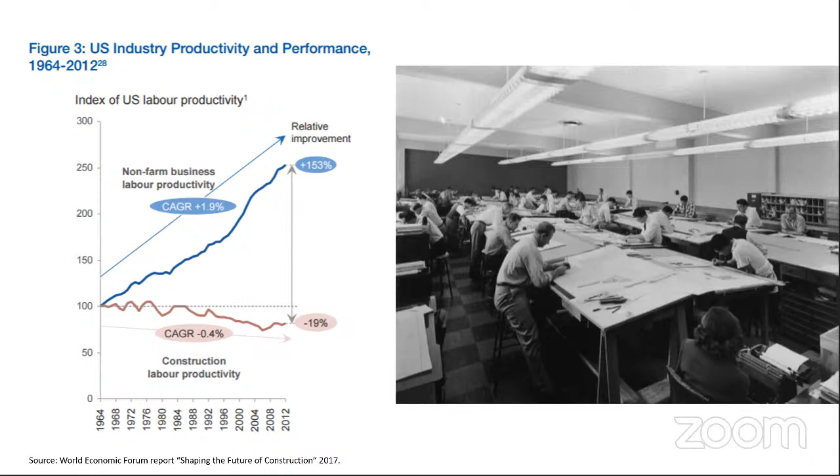A little about the industry itself: according to a survey, it is noted that compared to non-farm business labor productivity industries, construction labor productivity has dropped about 19% over 50 years. That means construction productivity has remained neutral, or in fact is reducing, owing to various reasons. This is because the civil infrastructure industry is investing a lot less on technology than other industries. For example, manufacturing industry is investing about 3.3%, whereas we are only at about 1.2%.

Given the 5-year construction output forecast, it is noted that rail, roads, and airports will take the main stage, and 50% out of that, the lion's share, will belong to roads and highways, which is about $5.2 trillion worth of projects coming our way. This creates an excessive demand in the way a project needs to be conceived and constructed. So we need to step it up. Relying on or moving to digital construction methodologies, or entirely digitizing your work process for design and construction, is estimated to save about $1.2 trillion worth of money for contractors, designers, and owners alike.

So what is the buzzword here? I'm sure most of the participants on this call have used BIM in one way or another. I don't want to re-emphasize that, but what is BIM for us from an infrastructure standpoint? It is a 3D model-based design which provides better design efficiency. 3D forms the crux of BIM.

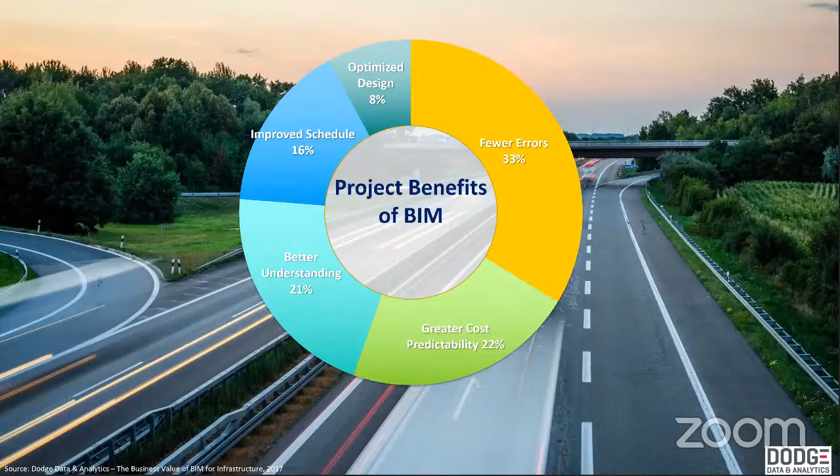So what were the business challenges when it comes to the design and engineering or consulting space, and the contractor space? What were the business challenges?

So project complexity is increasing, thereby increasing design time and reliance on various design software. And of course, hiring and retention of talent. If you ask new talent coming into your firms, whether owner operator, design consultancies, or contractors, they would want to work on state-of-the-art technology. So this is one of the challenges.

So in relation to that, let's see what benefits BIM could offer. You always have a competitive advantage over your competitors if you use a multitude of products and also rely on a BIM-based workflow, so that definitely is a plus.

And increased profitability. As you saw in the earlier slide, cost predictability was good, timelines and schedules could be met, thereby increasing profitability for an organization. And a lot less business risk, for example at your office, when it comes to change management and so on. And of course hiring and retention, as you look at the latest and greatest technologies for roads and highways design, your staff will be content with the usage of technology.

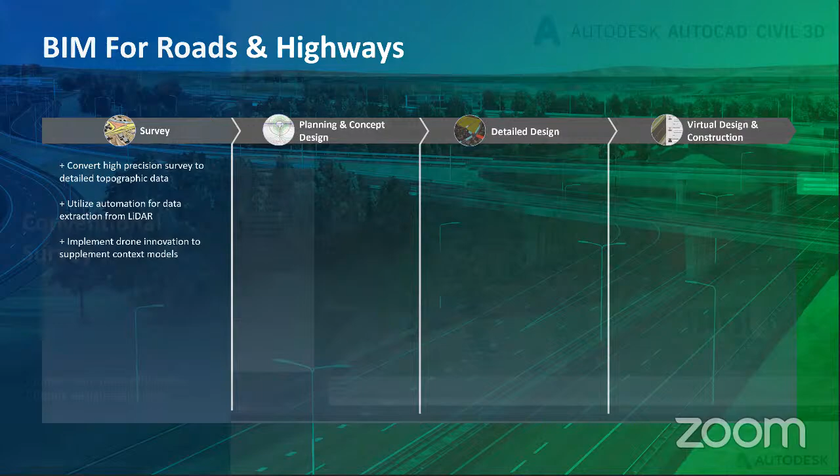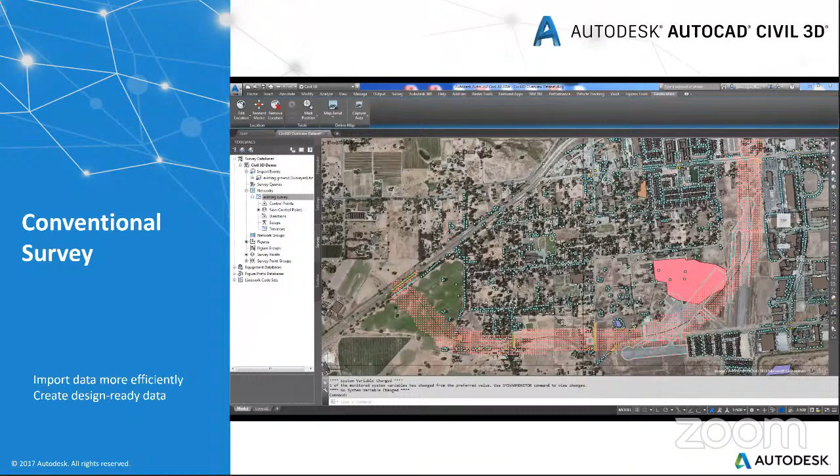This was the typical way in which people used to bring in survey data. So for those of you who are still on AutoCAD and rely on it to bring in survey data from total stations, Civil 3D will definitely be a blessing because it accelerates several steps in your survey data import.

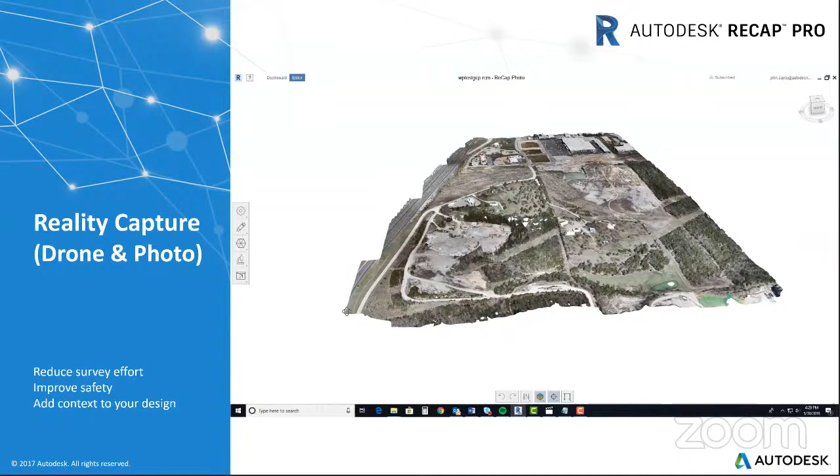While this was a conventional survey, there are other means by which you can import survey data. Say you're doing a preliminary engineering survey and you just have a drone with you, rather than relying on surveyors entirely for several days to capture information on site, you can fly a drone over it, take high definition photographs, stitch it like a 3D panoramic image, and bring it into interfaces such as InfraWorks. This gives a great deal of accuracy.

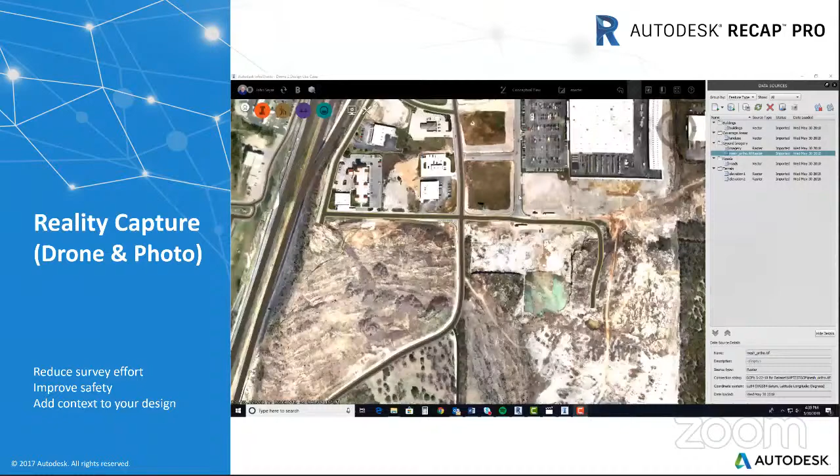This gives a great deal of flexibility to designers, engineers, and surveyors alike. If you're doing preliminary level studies, definitely this is the way to go. Rely on photogrammetry, convert that into mesh models, and use it in your design. This will give you greater cost predictability while bidding for projects.

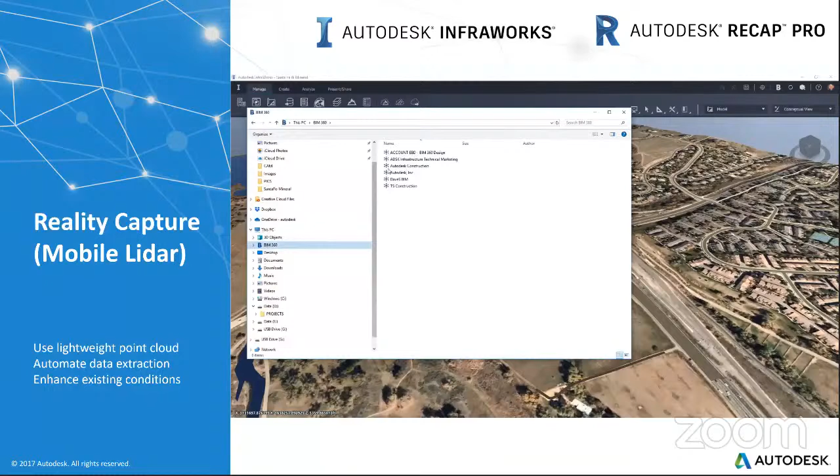While we talk about photogrammetry, what is more accurate, I believe, is mobile LiDAR capture. How are we capturing it? Again, using fly drones or mobile aerial devices to capture LiDAR information, and you have interfaces such as InfraWorks which can bring in LiDAR information, and there's a whole lot you can do.

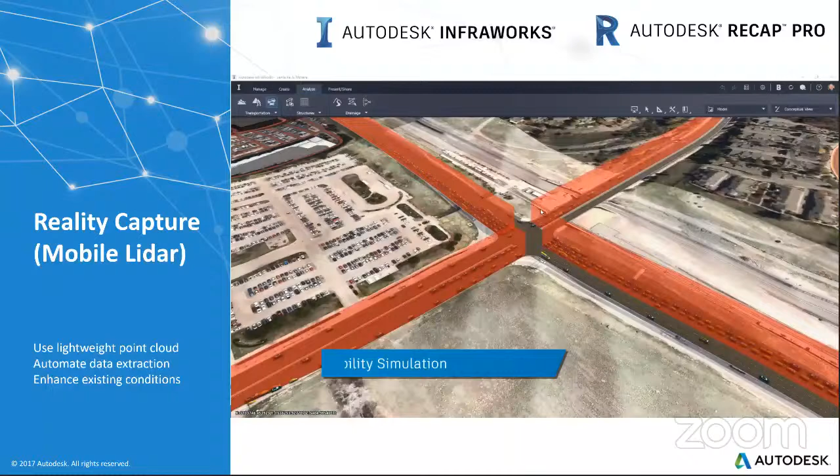Khandelwal sir talked about predicting traffic for a particular city model - you can do that with the kind of surface or models you're generating. What's more important is from an existing condition standpoint, you can capture a lot of features such as feature lines and break lines from the model, right from the mobile LiDAR data capture as well. This gives more accuracy to designers who take this data into their detailed design process.

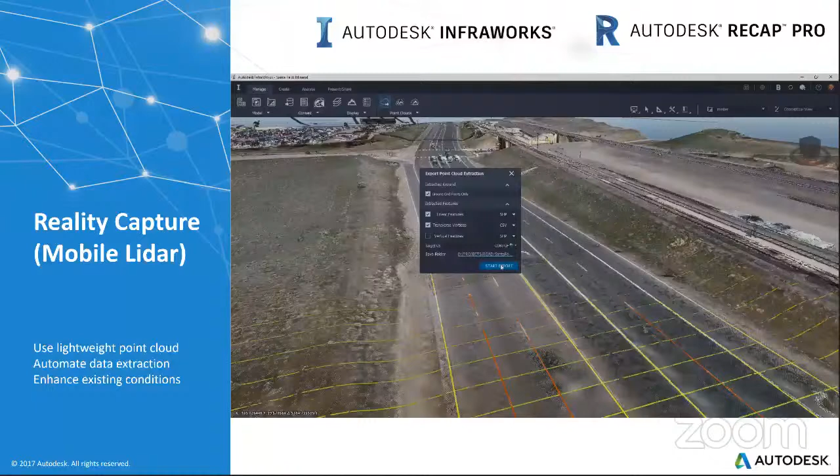So this is one other aspect. Coming to the next step, which is conceptual design - we talked about survey in terms of typical DGPS or total station surveys, photogrammetry, and LiDAR data, and how it can be utilized. Now let us come into the next phase, which is the conceptual design stage.

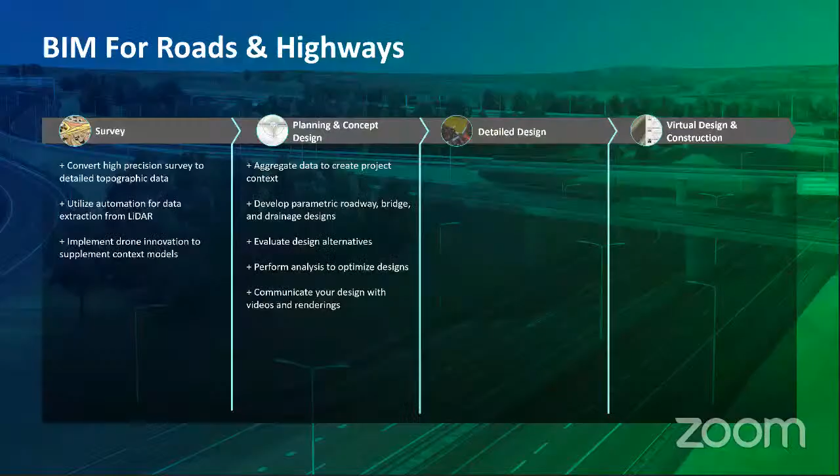What do you do in the conceptual stage? While I was working for a design firm before Autodesk, we used to crave for a concept modeling tool such as InfraWorks to be able to generate options, design alternatives, engineering options. Also, we were not able to connect various pieces like bridges and roads - are we looking at traffic capacity building for that particular road? All of this couldn't have happened on a single model.

Also, clients always believe in conceptualizing the project rather than looking at just 2D depictions of your design idea. So to this process, of course, we welcome it. InfraWorks has been a really popular tool over the last few years, and probably this is the easiest and most intuitive of tools when it comes to roads and highways design.

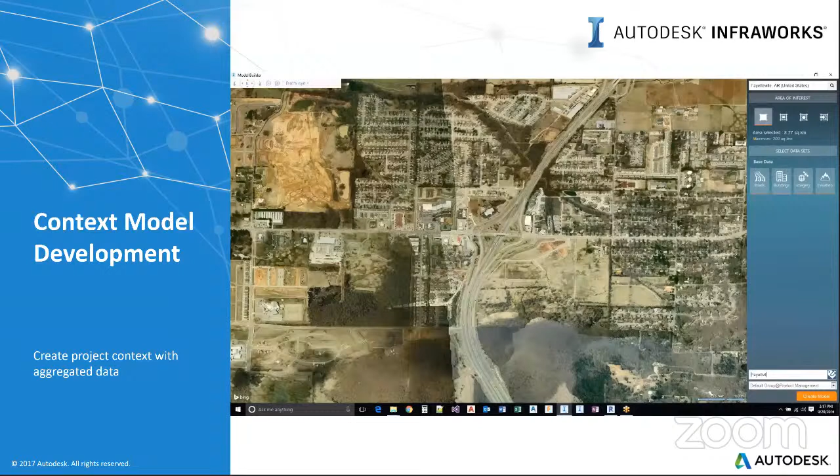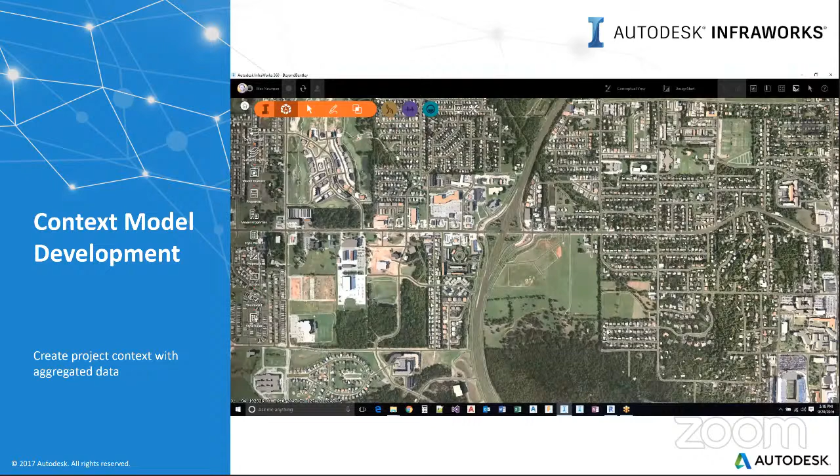It considers a lot of objects. First and foremost, you can bring in your study area onto your desktop and start churning out or sketching your design literally. If you're a project manager heading an infrastructure consultancy, sketch out the design ideas and give it to designers who can translate your design ideas into actual detailed design. This can happen using InfraWorks.

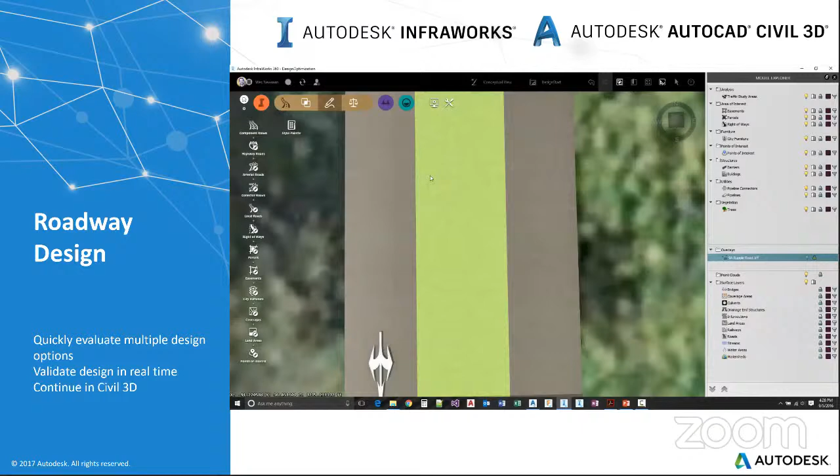Coming to roadway design alone, as I told you, I always crave for a conceptual design model which was constructible, which was practical. Taking into consideration the existing conditions, whether it's terrain, aerial imagery, or GIS data that underlies the particular project area, it is very important to see how your design ideas fit into the existing environment. That is more key, and just by looking at this, clients can assess whether a project is viable or not.

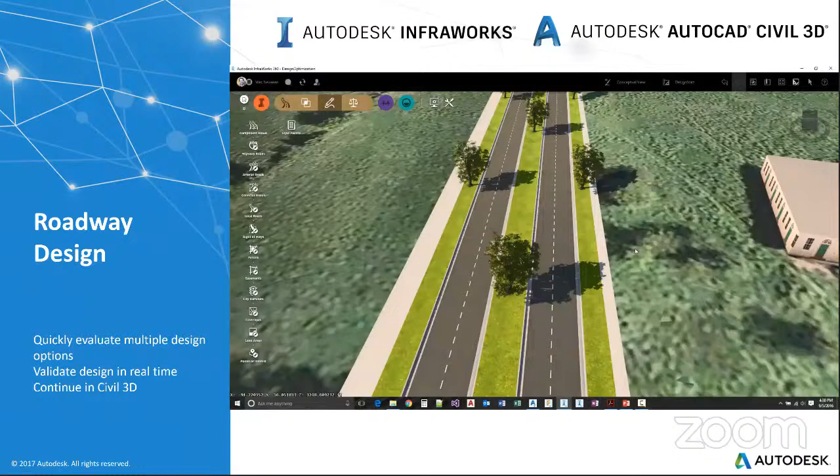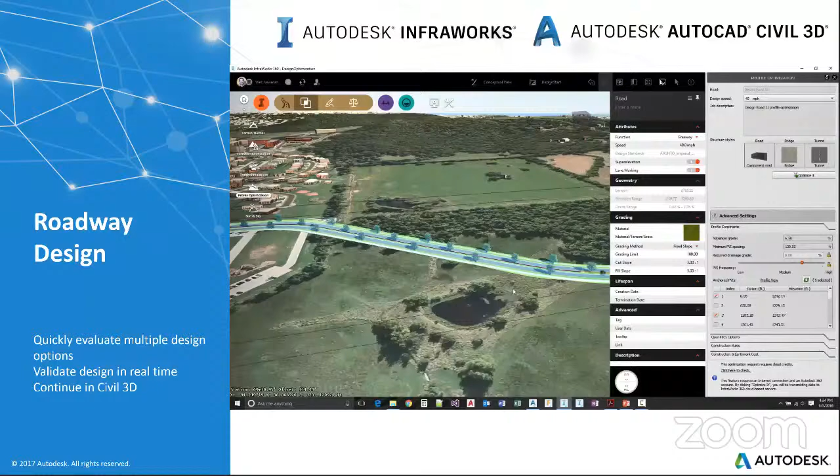You don't even need to rely on any 2D models. Also, the best part about having design tools like InfraWorks is it is an intelligent model - it gives you volumes, whether for roads, utilities, or structures, so you can know the kind of cost that will be incurred for that particular option. And what's more, everybody today wants to see the animation or actual 3D model of the project even before it is built, because a lot is at stake for them.

You can rely on InfraWorks for optimizing your design at the initial stages, and then pushing into detailed design and just tweaking the designs a little bit here and there. That itself saves a lot of time.

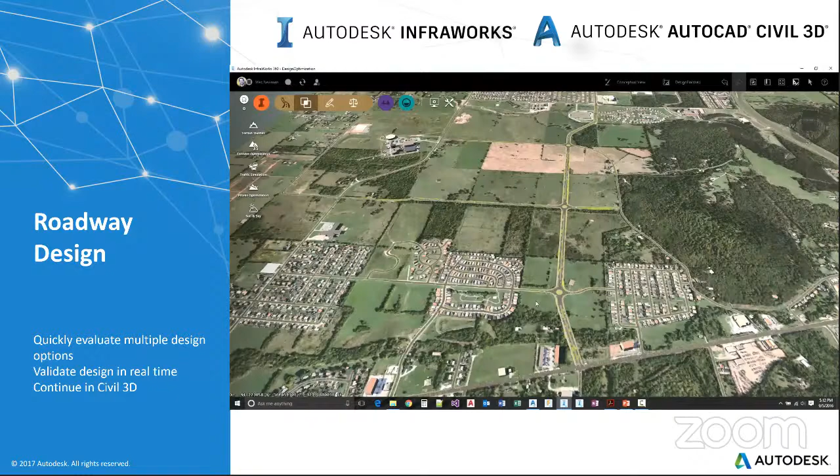Most people believe that convincing a customer on design alternatives is the toughest part, and design changes going to and fro with clients takes away a lot of time. I've heard people saying they've lost about 15 to 20% of their project time only to design revisions, which is not paid for in the India scenario.

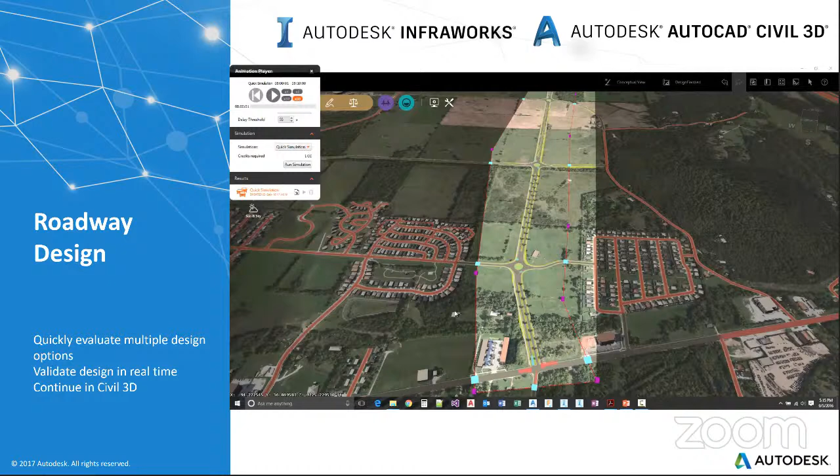So InfraWorks lets you lock on to the design alternatives suggested by the client and then go ahead with the design. This will in turn increase your profitability in the way you work on projects. So that is one aspect of it.

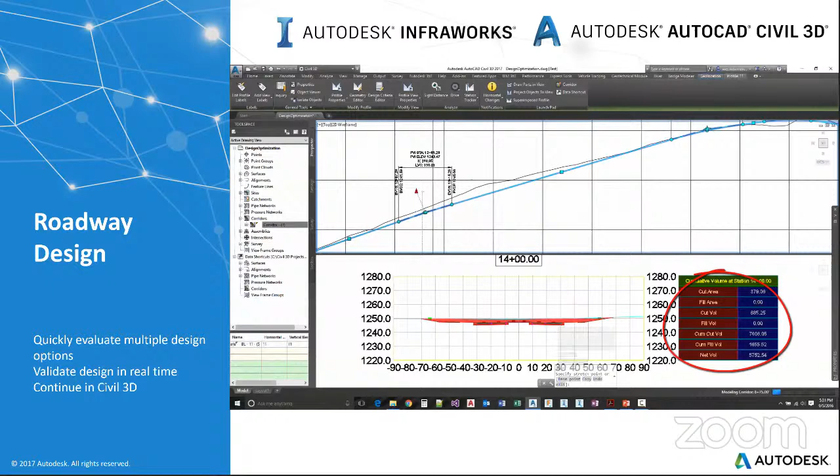And there's another thing - on the model, you can develop a lot of analysis, whether it's hydraulic, traffic, or multimodal simulations. All of this can be done to assess the viability of your road project, and the ease with which you can develop preliminary design and outputs can be really quick - almost instantaneous.

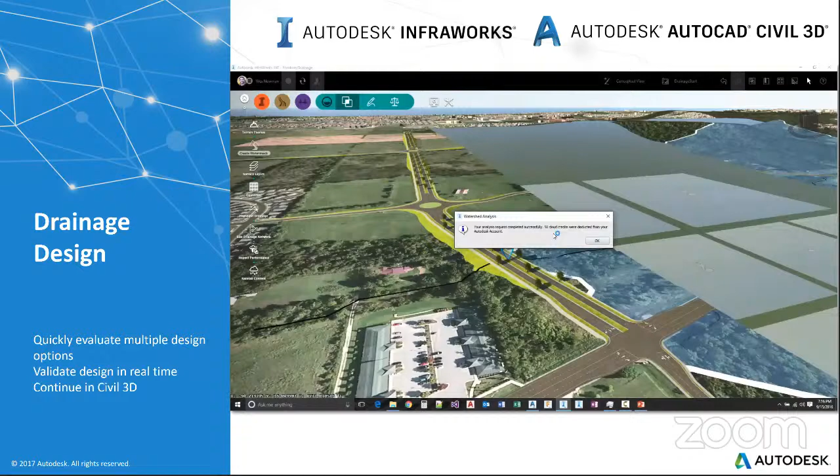Coming to the next aspect, that is drainage design. I'm sure all of you on this call have faced the issue of having the least number of structures along a particular highway, because structures increase the cost. So if you want to see a design alternative, it's also key to note how many CD structures you will require along the project.

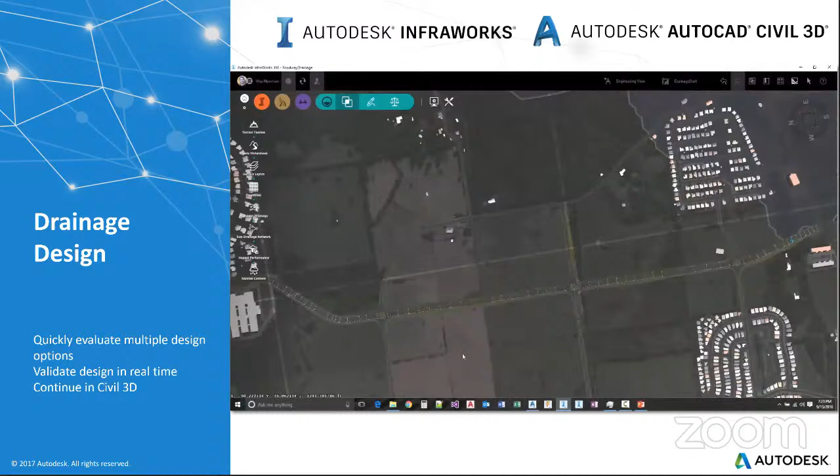How many culverts do you need? How many bridges do you need? How many tunnels do you need? All of this needs to be assessed, and the software will give you the locations everywhere you need a CD structure. InfraWorks will identify the outfall areas across your corridors.

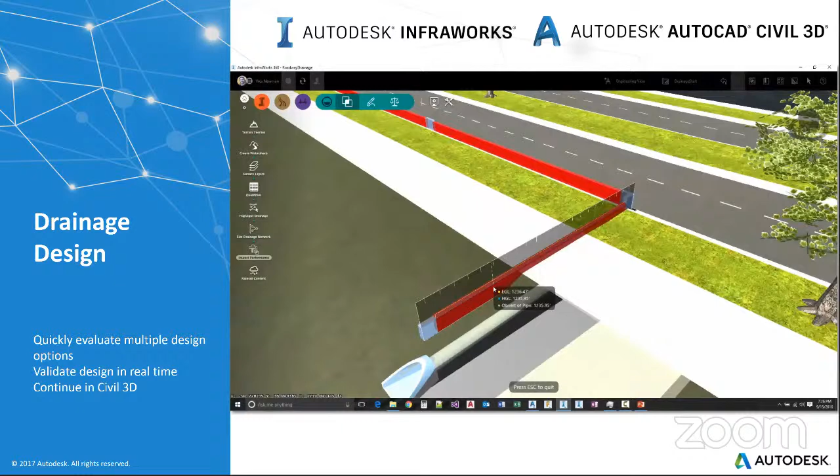It will allow you to develop surface drainage designs on the go as well, whether it's box culverts, pipe culverts, or bridges - it will allow you to assess the viability of that particular CD structure.

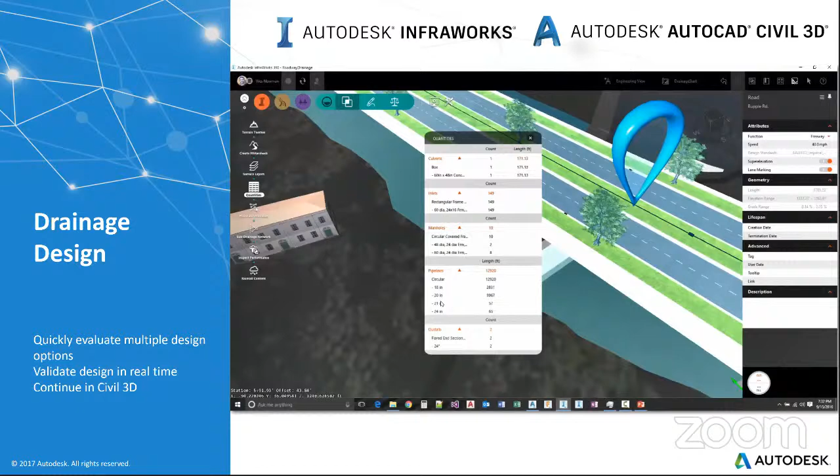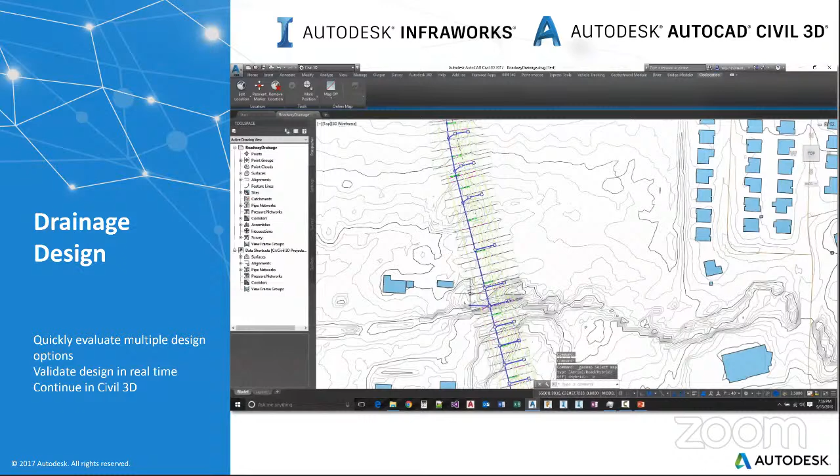And one other thing for bridges is something called flood simulation. You can see the proliferation of water along the linear waterway, and see whether your bridge design is sufficient or not - whether the length or height of the bridge is sufficient in terms of the water flowing through the channel. So that is one good thing.

The next thing is bridge design. As I told you earlier, we always struggled - when I was working with a design consultant, as Khandelwal sir said, we were working in silos. I completely accept that. Bridge engineers and highway engineers never used to interact on a regular basis, and our designs would never reach them in time.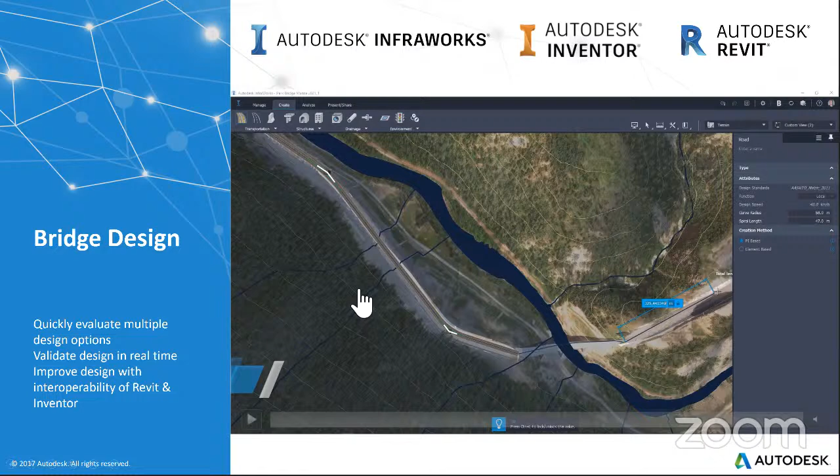We never had a common platform to share data, so our design ideas or thoughts would never come across to bridge engineers. In this case, say a highway engineer develops a road alignment in a particular way - a bridge engineer can come in and develop a concept level model of a bridge instantaneously.

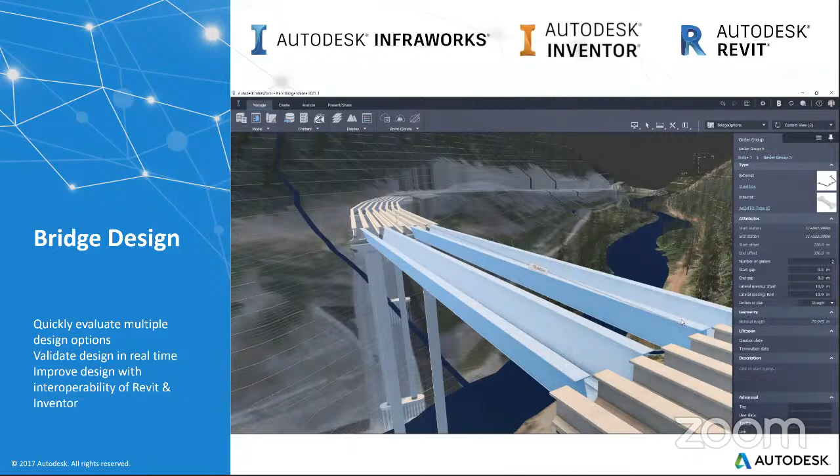He can also fine tune the designs - InfraWorks gives you an option of working out of spreadsheets. Your design can be translated into spreadsheets, and you can edit the values to see the changes. Anything in the bridge design, whether it's bridges, girders, piers, or pier caps, everything can be customized at the concept level design itself. What more do you need?

If your design is more or less ready in terms of design at the conceptual stage, I think during the design stage you can accelerate things and fine tune things to better suit your design requirements.

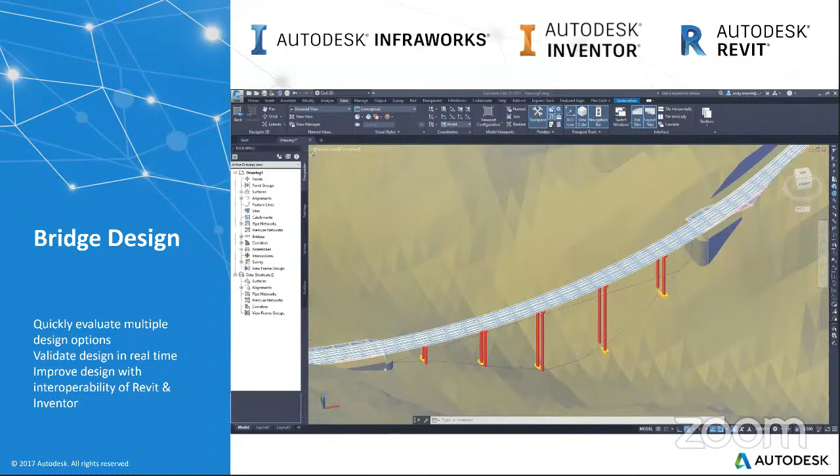Also for civil engineers or highway engineers, it was a challenge to bring in structural elements onto the plan profile or plan production drawings, whether it's the 3D model itself, plan view, profile view, or cross-sectional view. It was very difficult to bring in the structures. Now it is instantaneous - you can just plonk the structural design inside of Civil 3D from InfraWorks.

Right now, what would be the next stage in design? That would be preliminary and detailed design stage. What do we expect to do in the detailed design stage is, basically as I told you earlier, for BIM, 3D modeling would be at the heart of your BIM process.

So if you used dynamic software, it understands the changes you make in the entire process and adjusts to the changes you've made. For example, I'm quoting Civil 3D - if you change the alignment, the profile changes. If you change the alignment and profile, the corridor changes accordingly.

There are a lot of things that can be offered in connected design workflows. Civil 3D is an entirely developed BIM platform for roads and highways, and also a very well interconnected BIM tool.

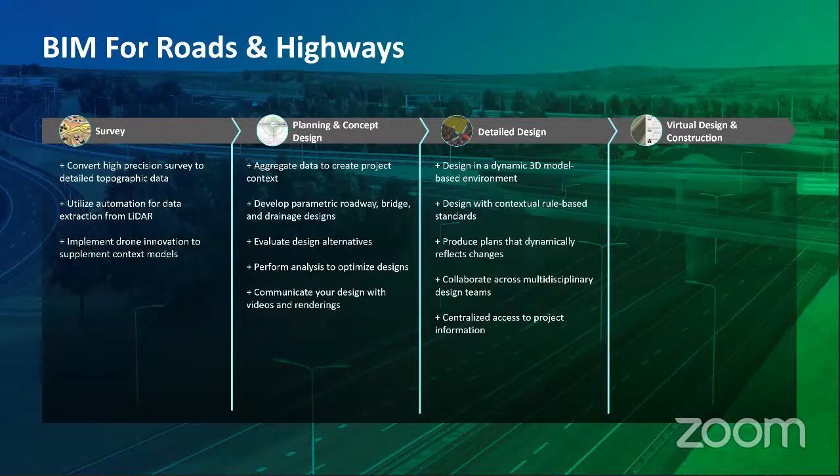Not only design, but you also have to take care of various aspects of design validation, which can be done within Civil 3D. Civil 3D is a completely model-based design. Whether you're bringing your designs from InfraWorks or starting off within Civil 3D, you have the flexibility to bring in each and every aspect of design inside the design model.

Whether it is land use pattern, GIS, or existing utilities around your project, all of this can be brought in, including the aerial map, to better fine-tune a project to suit that context.

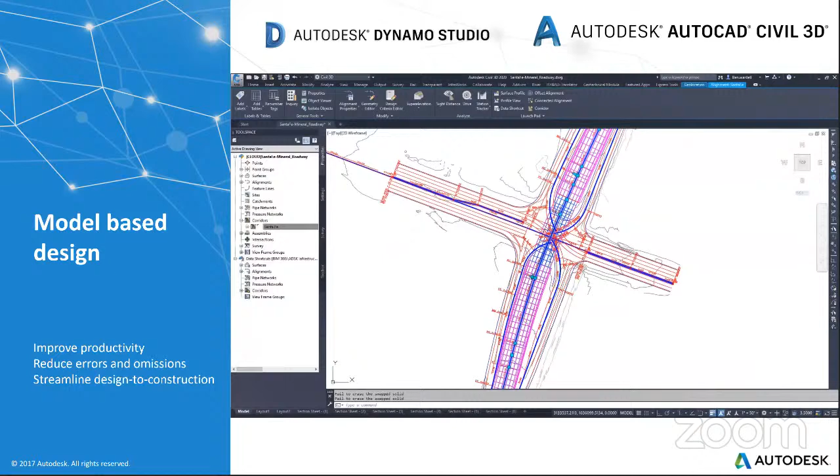As it is a model-based design, everything you develop is actually getting developed in 3D. The volumes are getting changed, and the model itself is getting changed according to whatever design changes you tweak inside the model.

Once you've developed the design model itself, as I was talking about connected design, what do I do with this 3D model? There are many other aspects that people consider today. Based on the 3D model itself, I can develop several automated tasks using tools like Dynamo.

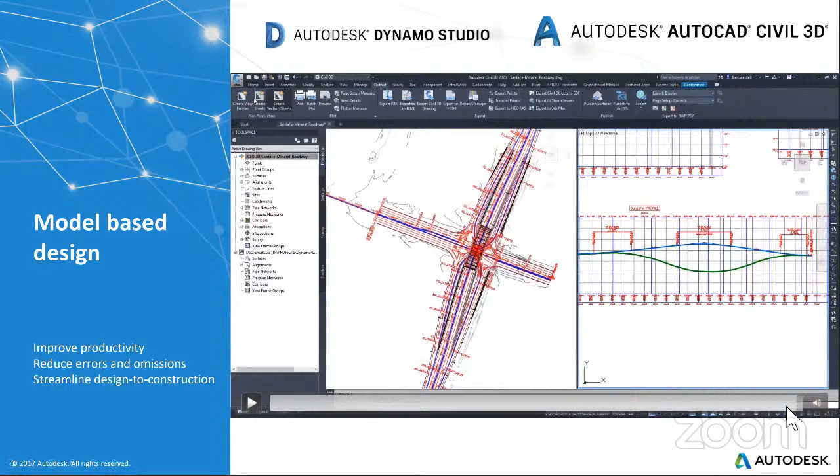As you saw in the earlier video, let me play it again towards the end. You can automate the creation of various city furniture such as railings, signposts, gantries, lampposts, and all of this can be automated and placed on the BIM model in one single click.

This is also possible when you're developing connected models, a BIM-based workflow. There's also a lot of enhancements we see in Autodesk today when it comes to infrastructure design.

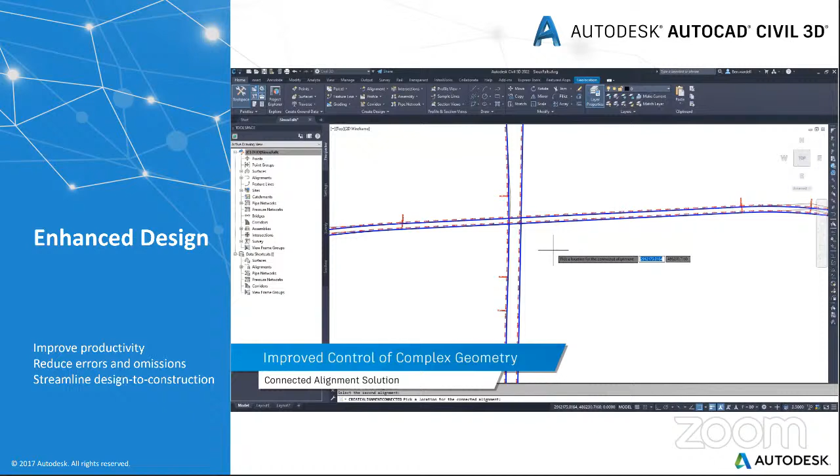I specifically talk on the connected alignment feature of Civil 3D, where many people find it laborious to develop alignments and profiles for interchange models. In interchange models, you have the capability of connected design between two alignments.

You can develop spirals, circular curves, or a combination of both to develop ramps, exit entry ramps, or the actual takeoff ramps as well.

This is a classic example of a clover leaf. As you can see, it takes two alignments into consideration. Why we call it connected alignments is it also matches the profiles - alignment 1 and alignment 2 - matching the vertical geometry as well.

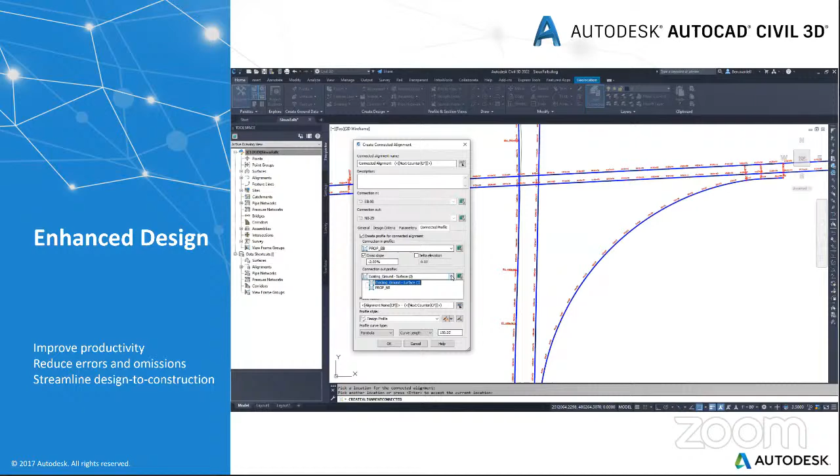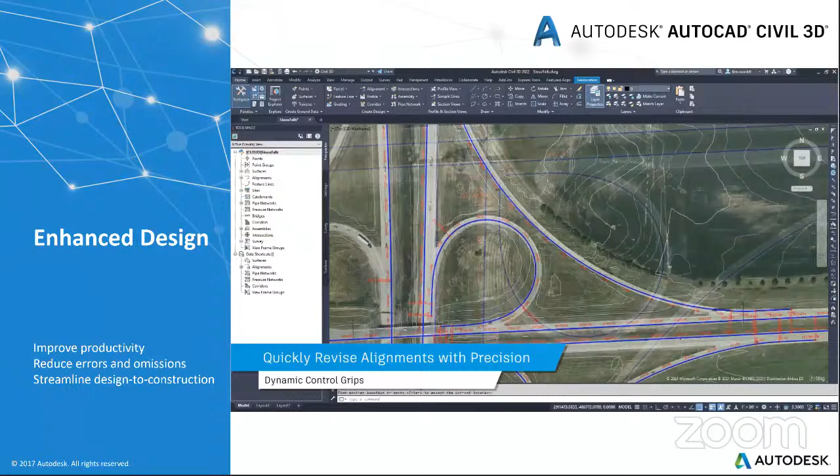So what better can it be? Your design is already half saved when you are matching alignments and profiles. This is a very quick way to develop your design. The rest of the things would be to fine tune your corridors with respect to the cross section you develop for this kind of design.

Why I emphasize this connected workflow, whether between software or within software, is that everything is interconnected. You change the alignment, the profile changes accordingly. You change any one part of the alignment, the loops get rearranged automatically. All of this can happen.

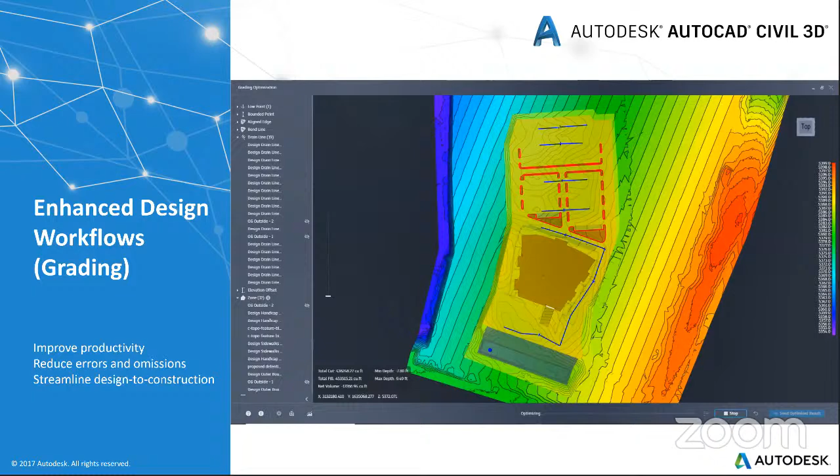If you remember, I talked a little bit on machine learning. Now, with the advent of Civil 3D 2022, you have the option of optimization of design. For those working on smart city projects with large areas to develop - internal roads, external roads - you can fine tune the land grading part of it.

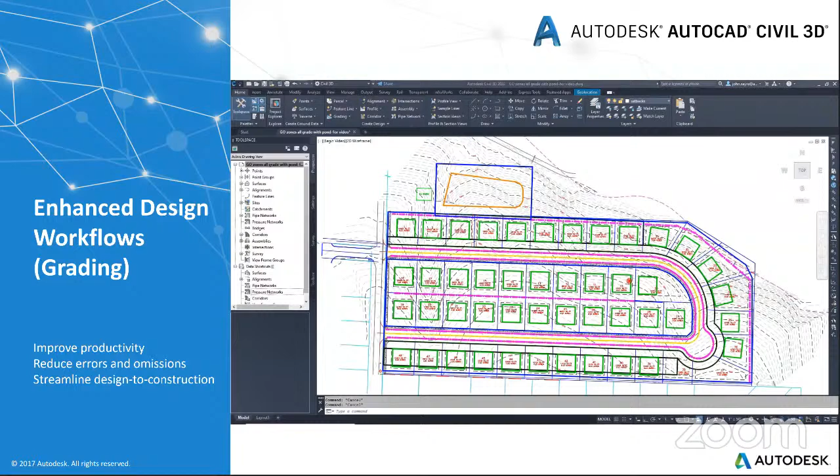This is a classic case of plot development, so leave it to the software. Imagine this kind of plot development or grading would take me any day in excess of 2 days. Imagine the software generating design options based on the parameters you're giving, developing the plots and internal roads to optimize the design.

It gives you an optimized output, and you can also see various design outputs that the software gives.

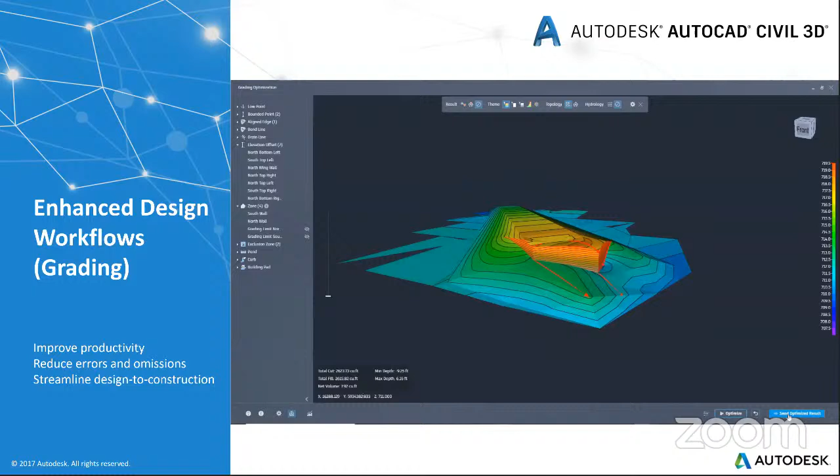Now, with Civil 3D, you can definitely achieve all of this using machine learning. Civil 3D also has machine learning inbuilt, which is called the grading optimization tool.

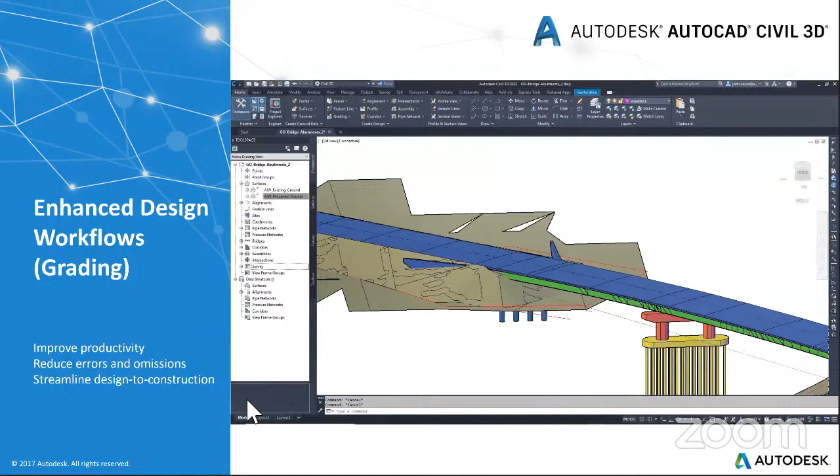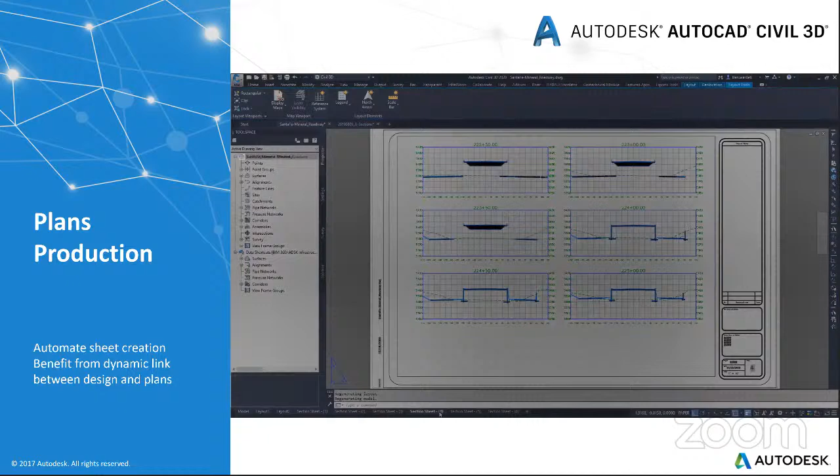As I told you about connected design, how do I relate to this now? Documentation is one of the most important aspects when it comes to connected design. If you have developed the model, why leave the onus on the draft persons to develop your cross sections, plan profiles, and so on? What if the tool itself could develop plans, profiles, and cross sections automatically based on the template you want? This was one of the greatest strengths of Civil 3D years ago, one of the first features developed, and it's still getting fine-tuned every year to suit the needs of our customers. So this is also a very good aspect in terms of connected design.

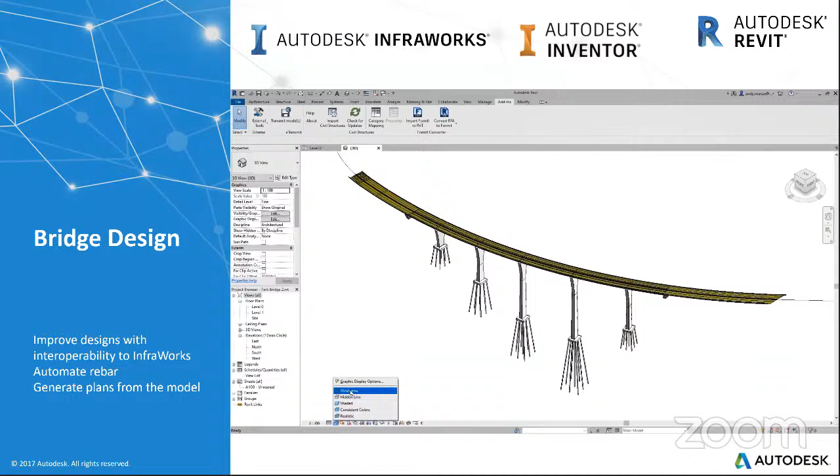When it comes to bridge design, we saw a simple swipe that created a bridge, but there is a lot more to bridge design in the design stage. Whether you bring your InfraWorks models into Revit, it's one click and it moves into Revit. If you change your design inside of InfraWorks, it notifies you. Like Khandelwal sir mentioned, it is not about people not notifying others.

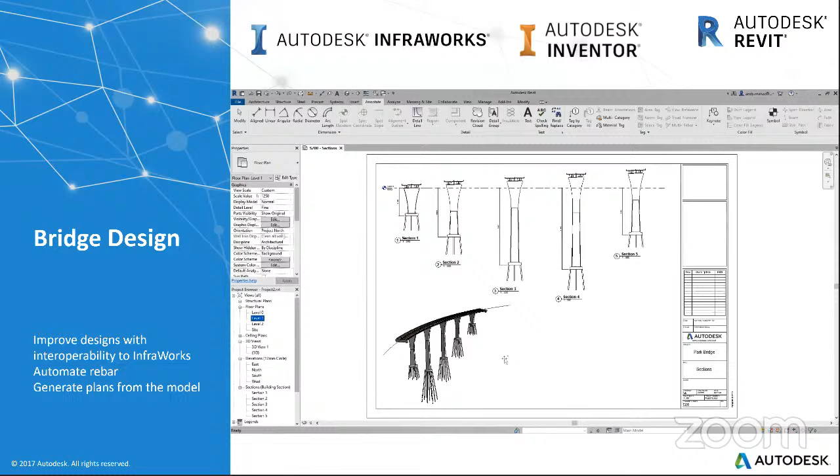They work in silos, they don't know what changes are happening. So if any change happens on one model or one software, immediately when you open the other software, the person working on design detailing of that structure gets a notification right within the software saying this bridge design has been changed. Do you want to update or not? Yes, he wants to update. It instantly happens. Based on these changes, you can make changes to your GADs, section views, profile views, and so on.

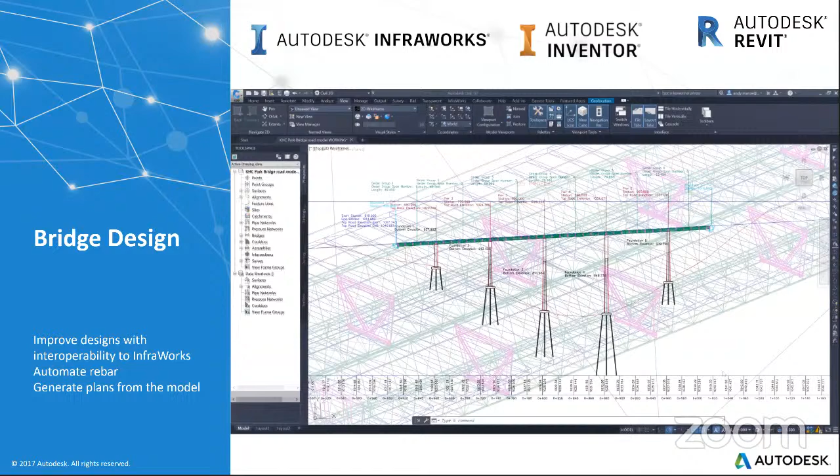A similar thing happens in Civil 3D as well. If you design bridges using InfraWorks and change the design there, it pops up a window saying the design has been changed. Do you want to update the model? This is a great deal for engineers alike.

So for bridge design, we consider InfraWorks to be the core of bridge design, around which various software are networked. For example, we use Autodesk Inventor for customizing bridge parts like abutments, bridge decks, and so on, and Civil 3D for the alignments and profiles.

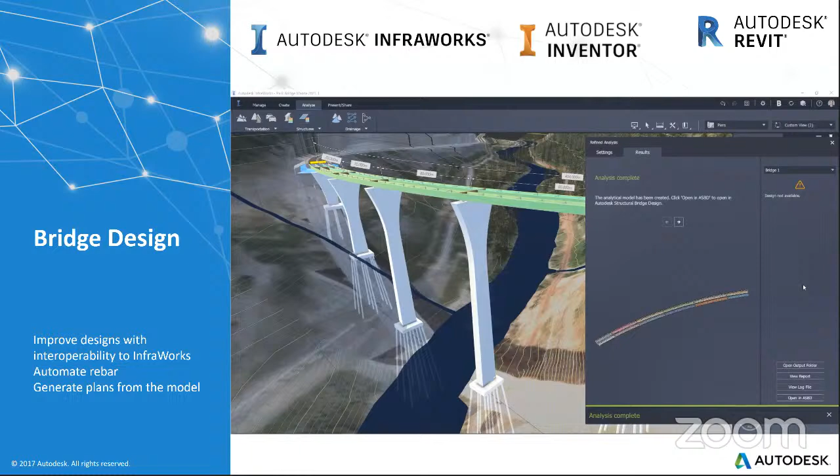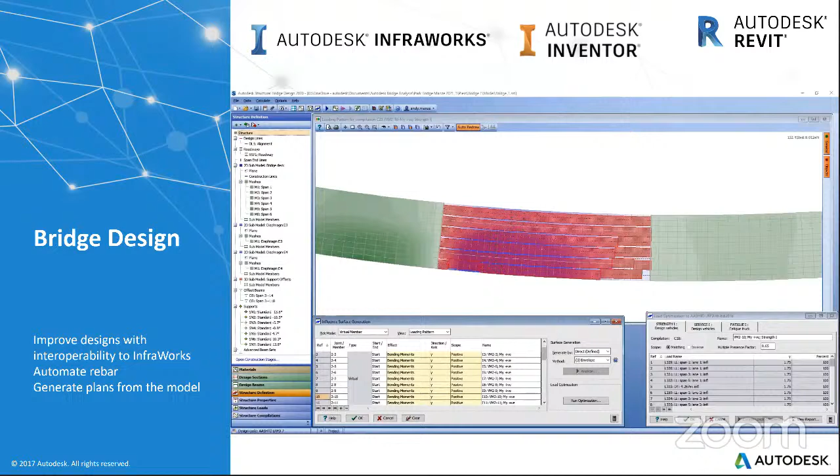Right within the InfraWorks module, you will be able to ready the model for structural analysis as well. For FEM-based analysis, you have Autodesk Structural Bridge Design. It prepares your model readily to be brought into this structural design module, and you can visually and numerically take care of the design. Once the model has been brought in, it's a simple matter of running analysis on top of it, and you can see the results, visual or numerical, on Autodesk Structural Bridge Design.

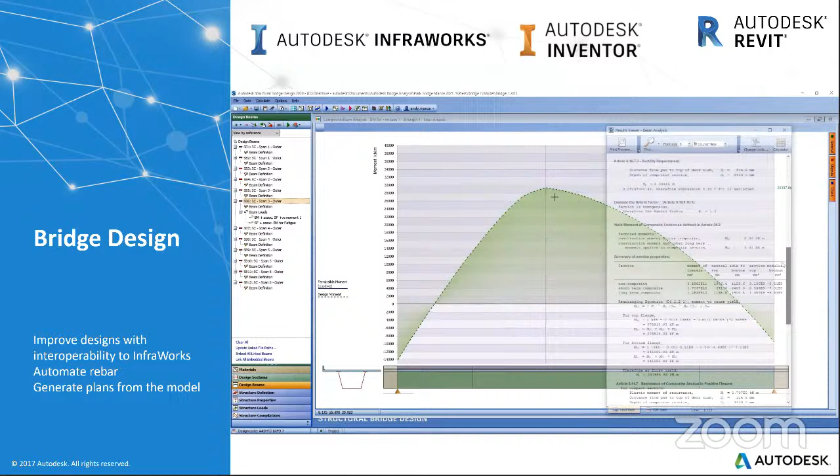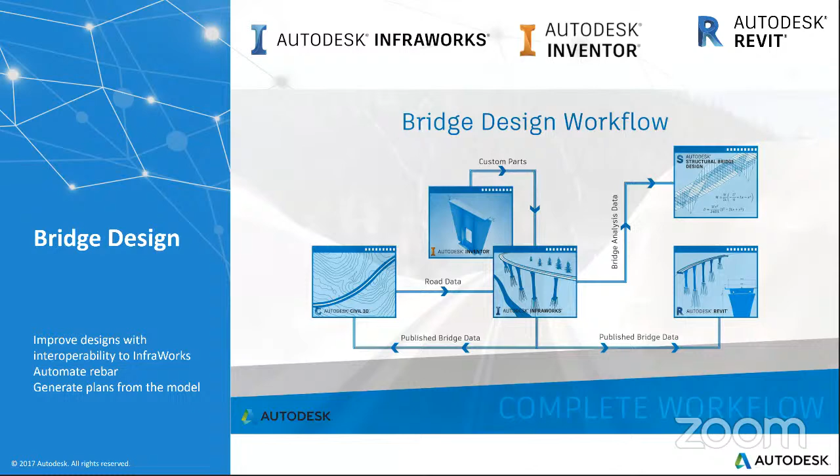So this is the connection you see happening in BIM. You develop a 3D model and push it into another model without wasting any time exchanging data between various software. Then you can get into optimization of girders using Structural Bridge Design and so on. This is a typical workflow of bridges when it comes to Autodesk solutions, so please have an idea of what this is about. InfraWorks will still be at the helm of bridge design, supported by various other products.

Coming to the last part, which is virtual design and construction, Sir talked about 4D and 5D simulations. We consider that once you develop your 3D model in Civil 3D, 5D was always taken care of, since cost is a byproduct of your 3D model. But 4D was largely remaining.

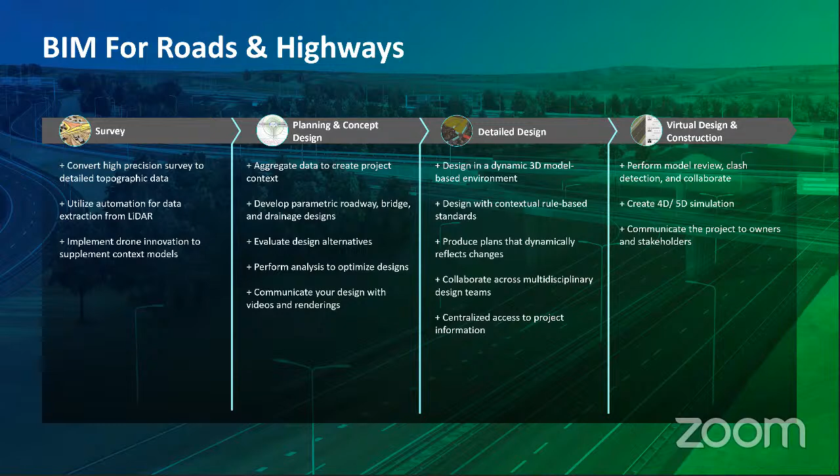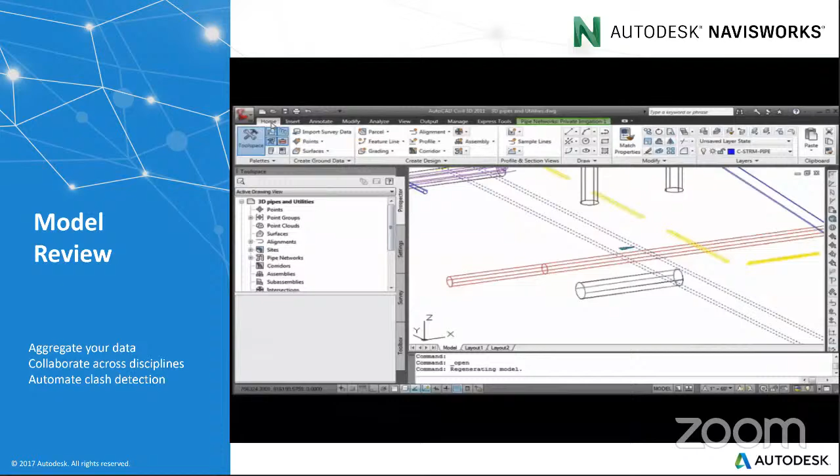We have software such as Navisworks to develop timeline simulations, or for that matter, clash detection. As I told you earlier, a road model is actually a multidisciplinary model—it contains utilities, roads, and structures. We should see a clash-free model before it even gets to site, because changes at site can be very expensive. Navisworks is one tool that allows you to make design changes even before it reaches the site. This is a great deal for all contractors, and most of them do design coordination even before they jump onto construction.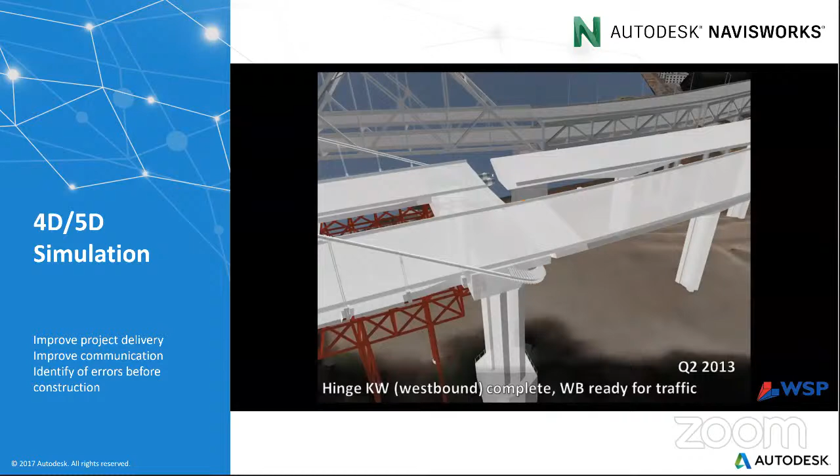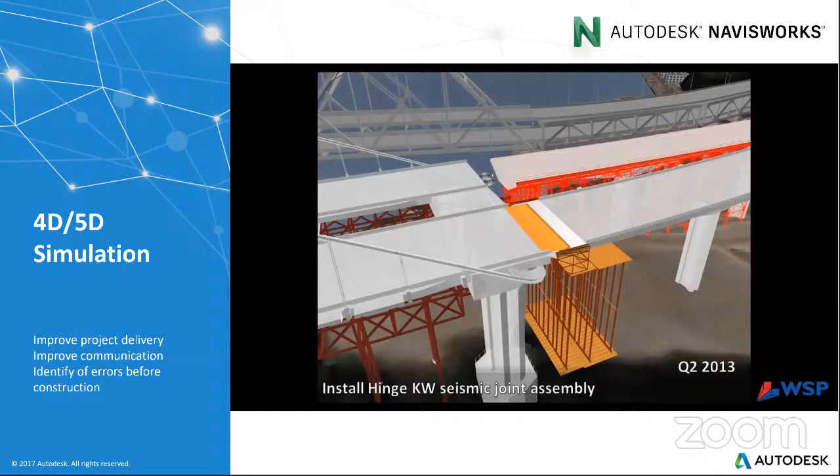And also timelining—by using Navisworks or a combination of other products in the Autodesk portfolio, you can see the project timeline as it is, because the BIM model understands every aspect of your design, whether it is BC, DBM, WMM, GSB, or subgrade. It can simulate the construction of each and every layer in a timelined manner based on the Gantt chart you prepared, whether you want to link it to Primavera or MS Project. You can link your design models to anything and then see the timelining of the same.

So coming to collaboration and coordination, like Sir was saying, you need a single platform or a virtual platform on which everybody, all the stakeholders of the project, need to work. This definitely is one of the best things that has been said.

So yes, we need to establish our design models, whether it is roads, highways, or bridges, on a common data environment, which you can consider as your shared drive on the cloud, where anybody can access any file at any given point of time. Access your files anytime, anywhere, whether it's the owners, the designers, the engineers, or the contractors. They should be able to access and mention the changes required right on a central model.

This is possible when you establish your designs or store your designs on a common data environment platform such as Autodesk Docs, and you can collaborate with various team members, whether it's surveyors, designers, drafters, structural engineers, or bridge engineers. You can work out of the same model at the same time.

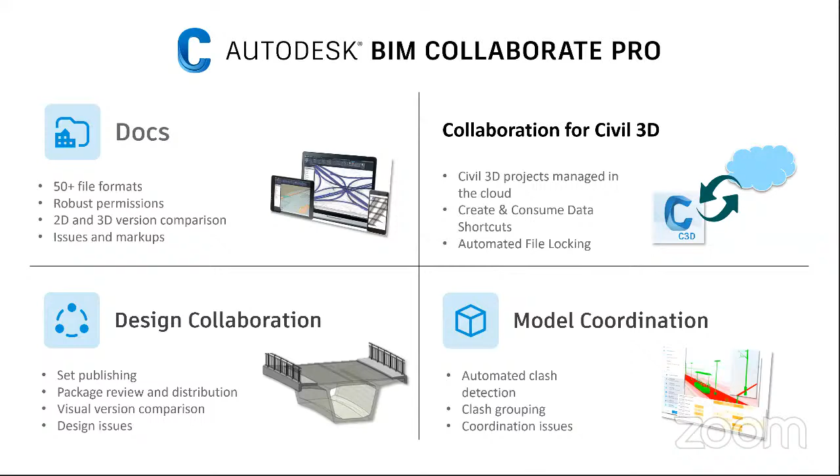There's also the matter of permissions. You don't need to give permissions to everybody in the project. You can control the access to the files based on the profile of that person. All of this can happen using Autodesk BIM Collaborate Pro.

The three main takeaways from BIM Collaborate Pro would be better collaboration, better communication in the project, and of course, better project coordination. If you can see the collaboration...

Civil 3D collaboration on its own will have this typical interface. It'll be just like accessing any cloud storage system, whether it's Google Drive, OneDrive, whatever. The only change is this has been made with design data in mind, made with the various personas inside the AEC industry in mind.

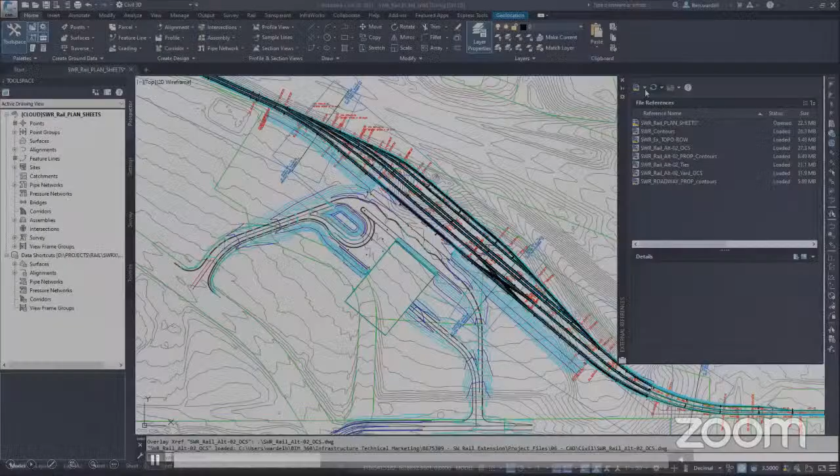So you can collaborate and coordinate based on a central design file. If a project manager wants to see the changes occurring in the project, say from version 1 to version 2, and wants to see what design changes have been made, he can instantly go into the cloud platform and have a look at what changes have been made.

If you see this swipe feature, the design changes can be seen instantly, whether it's option 1 or option 2. You can change or revert to whichever version you want on the go as well. That is the beauty of it.

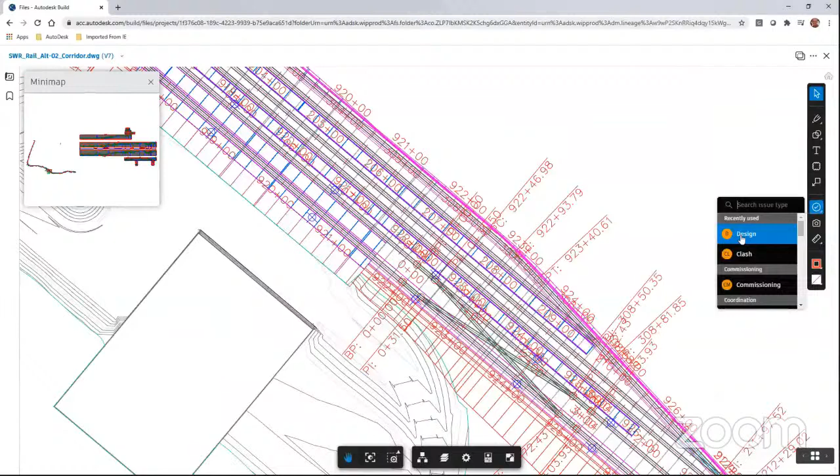And if there's any particular comment that a project manager or higher-up wants to make on a particular project, he doesn't even need to open the software. He just needs to log into BIM Collaborate Pro, mark the changes, and send it to the designer. He can assign that change to a specific person, and he gets a notification saying that this person has requested this change. How are you doing it? There's an issue in this design. Have you resolved this issue? All of this can happen.

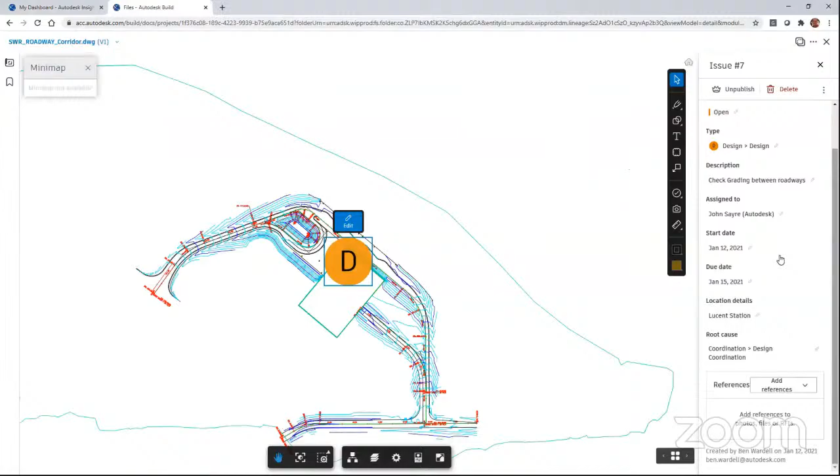On the cloud itself, you can have a lot of model coordination as well on the go. This is particularly important for BIM coordinators. They can bring all the models together, whether it's electrical, structural, or linear design, and have a look at this.

Last but not least, we also need to understand how connected BIM workflows work and what software would be required during the course of the project. You need to establish the entire project on BIM Collaborate Pro, which forms the foundation. Then from survey onwards, for planning and concept design, you use InfraWorks, a combination of ReCap as well, as you saw for LiDAR data. You use Civil 3D for documentation, 3ds Max for visualization, which is definitely helpful if you're bidding for projects.

During detailed design, of course, the hero products come into the picture. The hero products are Civil 3D for road design, Revit for detailing out your structural design such as bridges, tunnels, culverts, and so on, and Dynamo for placing city furniture, automating city furniture on your device.

On your model, use Autodesk Vehicle Tracking for design validation, swept path analysis—I'm sure you've heard of AutoTurn, AutoTrack, that's called swept path analysis. Coming to virtual design, you only need two aspects: if monitoring progress, you need ReCap Pro to superimpose it on your design model to see progress, or you need Navisworks to develop timelining for your project.

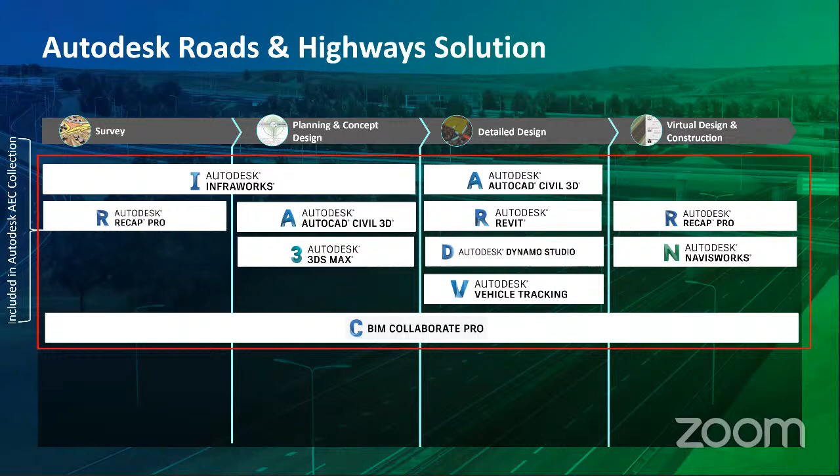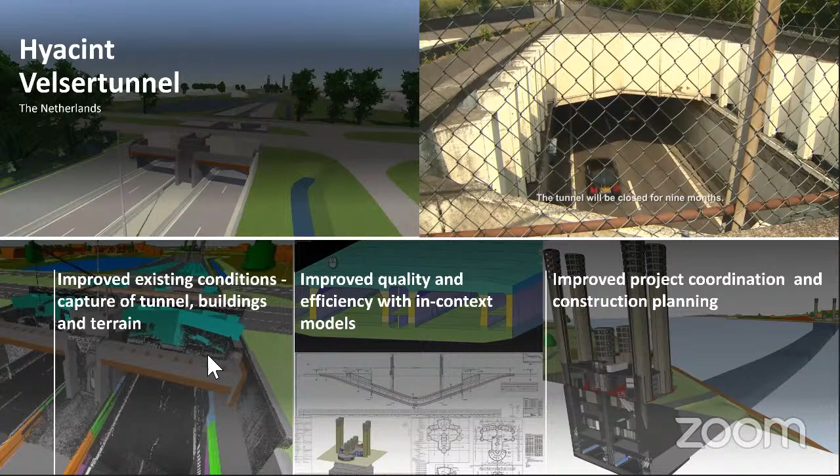So some of the customer stories—I don't want you to get into the details of who the customer is, but I want to draw your attention to the text at the bottom of this slide: improved existing condition capture of tunnels, improved quality and efficiency. These are takeaways customers want in their day-to-day life—improved project coordination and construction planning. How great it is when a customer says this, if they've inculcated BIM workflows in their day-to-day design.

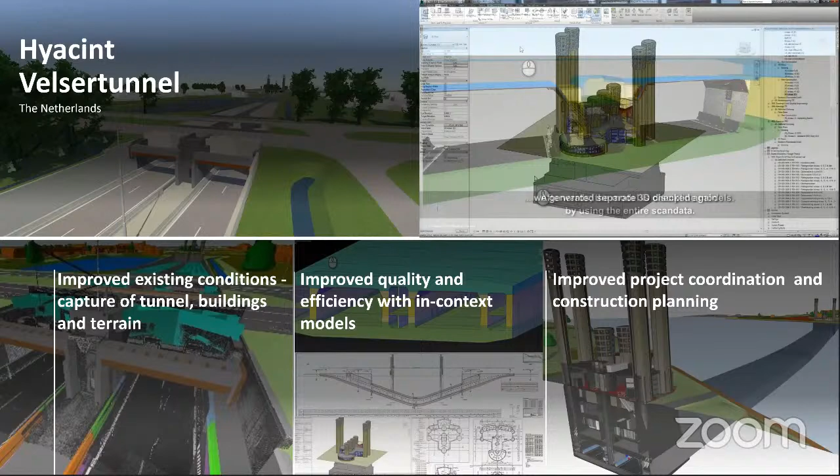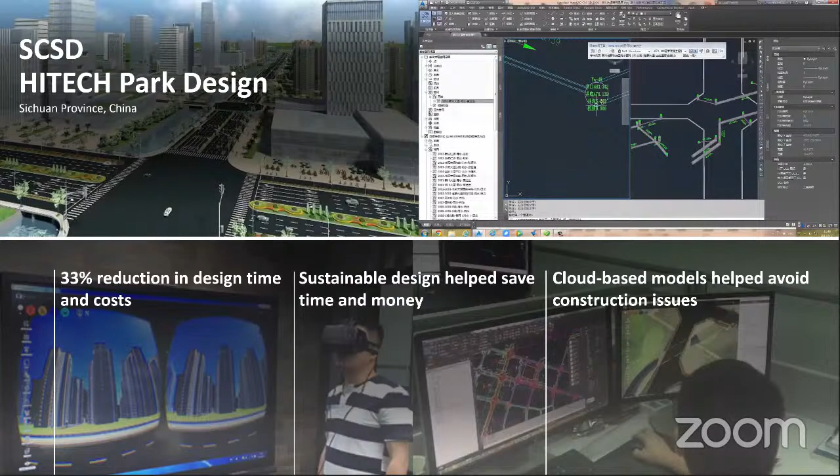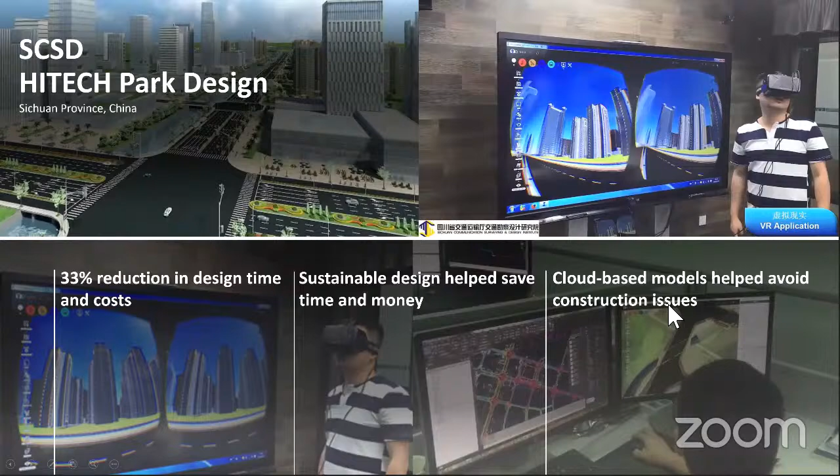Also, have a look at the video at the top—they say 33% reduction in design time and cost. That's phenomenal in an industry with one of the least profitable margins in the world. If they save 33% in design time, that means 33% more can be used for other projects. Sustainable design helps in saving time and money, and cloud-based models help avoid construction issues. Everything translates to cost saving or improved profitability. Connected design can lead to all of this.

And the third one would be Clark County, Washington Public Works & WSDOT, where you see quick redesign of interchange with 3D modeling, minimize conflicts, and improve quality with cross-discipline design, and improved construction planning—these are all benefits it offers. And of course, this was one of the very first projects we saw entirely done on BIM, right from concept to commissioning, by WSP. So obviously improved early-stage alternatives help speed approvals.

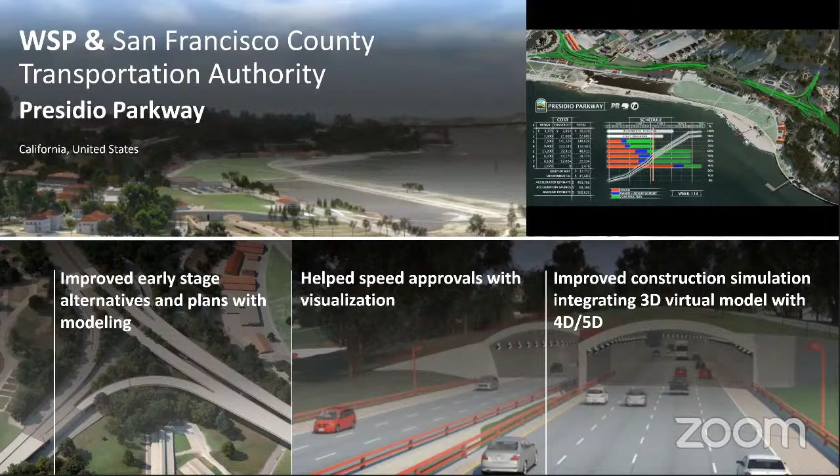This is key for any design engineering firm. And improved construction simulation with respect to 4D, 5D—all of these are some of the advantages. So with that, I come to the end of my presentation.

I'm open to taking questions now. We have about 5 minutes before I take questions. I hope I clearly explained the connected nature of BIM in today's date and what people are using for design and development.

Thank you, Ramesh. Thank you, Vivek. There are a lot of questions, so in the interest of time I'll try and see—I think some of the questions you have already answered during your presentation.

Then Pawan has asked how the topography survey is carried out, aerial or physical, and how this collected data is implemented in BIM. Mr. Khandelwal, I'll also request you, from your experience of actual execution of the project, to address some of these questions if you'd like, please feel free to add from your own experience.